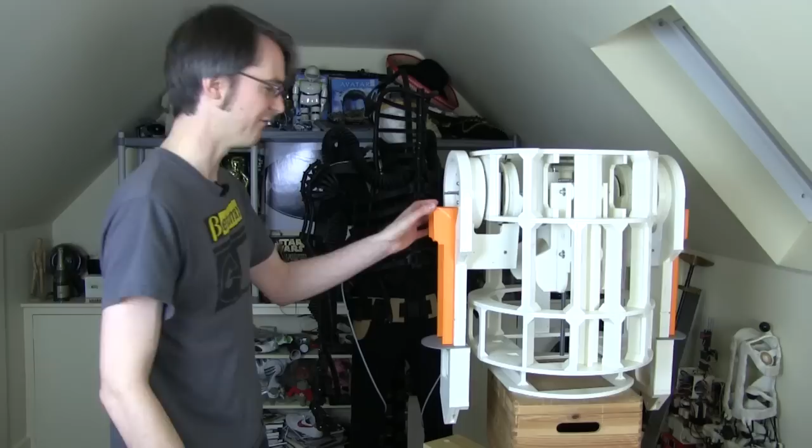So they're not too bendy. There's some more reinforcement to go in where this booster cover is, the orange part. So I think they're going to be okay, but they are slightly thinner than they should be. There's still the shoulder horseshoe pieces to go on, which will make them thicker. But in fact, there should be about another inch on the back of the leg, so they're quite a lot thinner.

So I've stuck these on quite well now with acetone weld, so there's no way to backtrack and redo it. Eventually I'll release the CAD files, and this is one of the reasons I haven't. So if you're building this from the CAD files, you need some more layers on the back. These legs are all made of 5mm layers stuck together. So today we're going to try and sort out the motorisation of the feet, and then we can hopefully try and drive it around and properly test that 2-3-2 conversion without a skateboard.

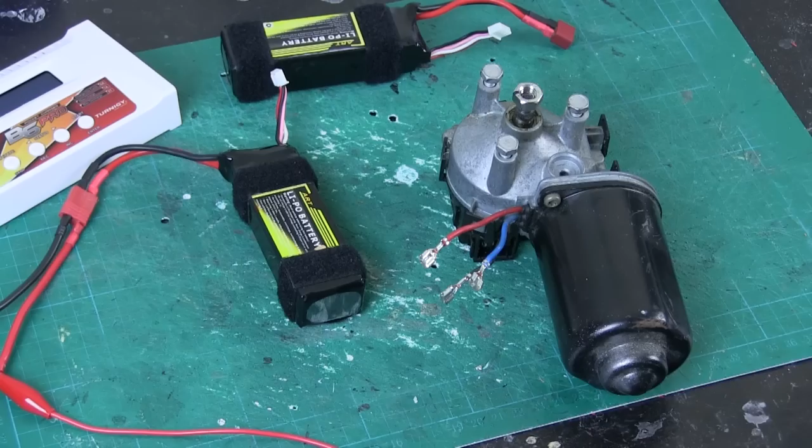My plan for motorising the wheels in the feet is to use these motors I've already got. I've looked at brushless motors and various others, but I've decided in the end to use windscreen wiper motors because they're good workhorse motors, and basically they've got a fair amount of power in them. I'm going to be powering them from some 11.1 volt lipos.

So I got hold of some batteries. They're actually second hand and I didn't pay very much for them. So I've got a number of them. They're 2 amp hour. So I've got 2 here and a couple more. I know where they came from, so I guess it's no worse than if I had used them myself. However, lipos can be quite dangerous because they can burst into flames and things if you're not careful.

So I've actually bought a fairly decent charger, which is the Turnigy charger, which does balance charging. So you've got this little cable that plugs in the side so it can balance the voltage of all the cells, and it can discharge and condition them and so on. But they seem to be charging fine.

So the good thing about these wiper motors is they've got 3 wires. They've actually got 3 speeds built into them because obviously they have to wipe the windscreen of your car. So if we go between black and red, I've put a little marker on this nut that's spinning.

So you can see that I think is the slowest speed. Black and blue goes a bit faster, and if we go between red and blue, it goes faster still. However, even in the fastest speed mode, we only get about 2 revolutions a second. So even with a 100mm wheel, we'll cover basically 2 feet a second, which I think equates to just over 1 mile an hour, which isn't really quick enough.

So actually what we need to do is hacksaw through this metal, and I've done this before for my boat propeller project. So I need to get my hacksaw out and start sawing through this. My plan to actually drive this is to use a V-belt, so instead of having a belt with teeth on, I'm just going to have a belt that grips with friction in this V shape. That means when it's pulled tight, it's pulled tighter into the V.

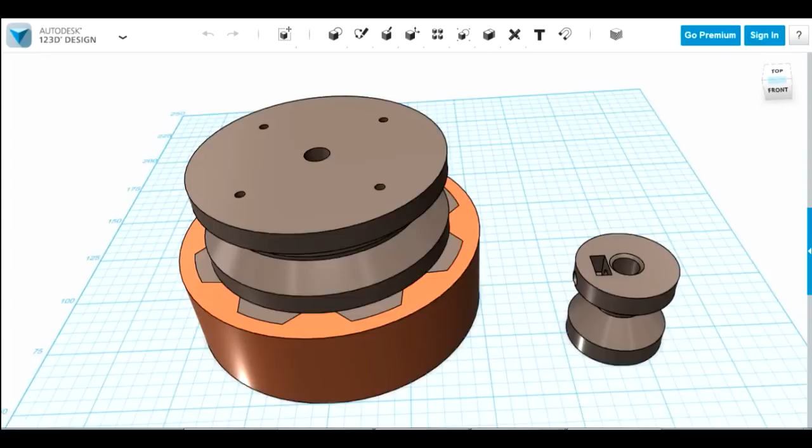So the smaller pulley there is the one that goes onto the motor, so that's going to have a captive nut in that square hole and a bolt that goes through the round hole, which then grips the shaft, and there's going to be a flat on the shaft in order to do that. The wheel itself is made of these two parts, or in fact three really. So we've got another V pulley which is going to be coupled onto it, and then we've got a wheel, and the wheel is going to have a rubber tyre on.

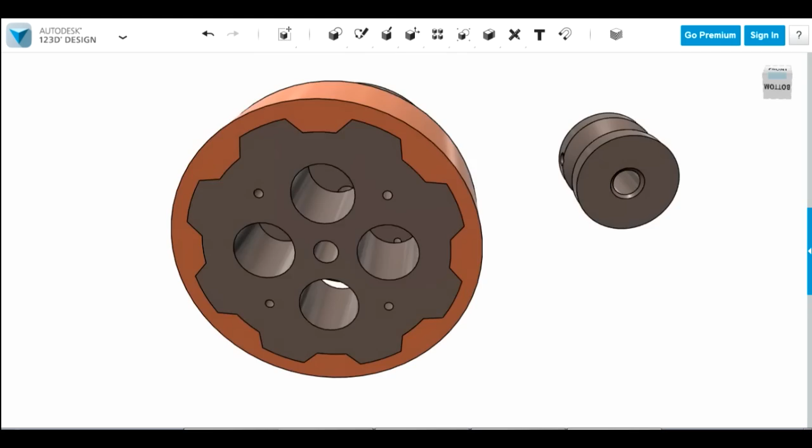So this is going to be printed as a hybrid print, with both parts printed in one print with dual extruders on the Lulzbot TAZ with a flexi dual extruder. So one is for extruding Ninjaflex, the other one is for extruding rigid material. So we're going to print this wheel in one print. So here is a previous hybrid print, which is a very similar example. It's one of the first prints I did with dual extruders, and this is a Ninjaflex tyre which is red on an ABS hub. That was printed in one print with dual extruders, and the two materials are bonded together with heat.

So the problem I've had with dual extruder prints in the past is that Ninjaflex compresses in the nozzle while it's printing, so when you switch and print with the ABS nozzle, it decompresses because it's very elastic, so that causes the Ninjaflex nozzle to ooze quite a lot. And that means the pressure's gone in the nozzle, so when it comes back to print with Ninjaflex, as well as putting ooze on the print, we find that the first bit it prints with Ninjaflex is missing because there's no pressure in the nozzle anymore, because it's all oozed away.

So if we look very closely at this, we should be able to see, perhaps, that right round the edge here there's kind of a dodgy gap where there's not so much filament, which makes a weak spot in the print. And obviously that's okay if the part is really solid, but if you're trying to do a fine print, then you'll find that you get lots of gaps in your print. So we need to adjust the slicer settings to try and compensate for that. I'm going to do two things in Slic3r which sets the settings for the actual printer.

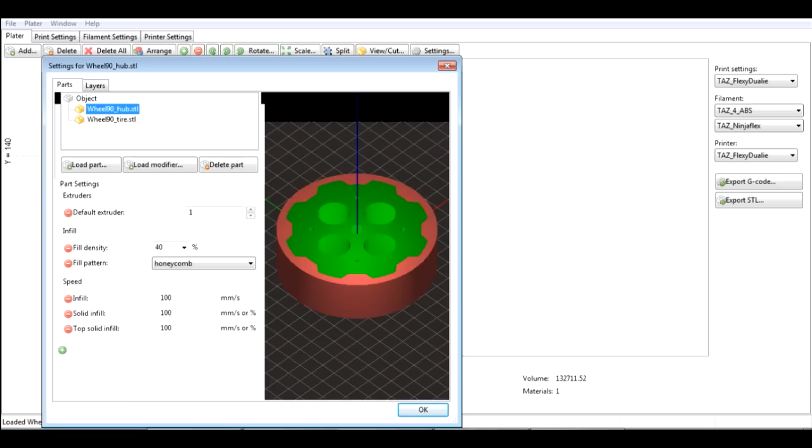So here's my hybrid print. So the hub is green when I select the hub STL, and the tyre is now green when I select the tyre STL, and each one has a series of settings. So my hub is going to print with the default extruder of 1, which is for ABS. It's going to be 40% honeycomb. The tyre is going to print with extruder 2, and it's going to be 100%.

So basically what I've done here is set the infill to print much slower for the Ninjaflex. So the hub there I'm printing at 100mm a second, and the tyre I'm printing at only 30. And the reason for that is that the infill is the last thing it does before it switches extruders. So it does the perimeters, then it does the infill. So that means if it slows right down before it switches extruders, then there won't be so much ooze because there's not so much pressure building up in the Ninjaflex nozzle.

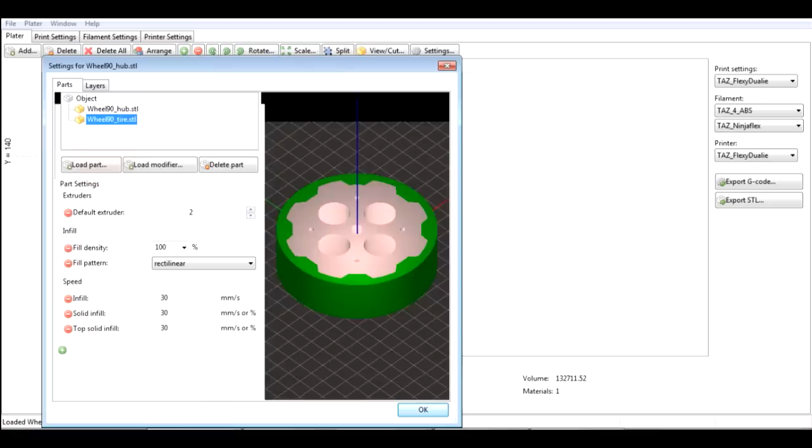So some of that filament is still going to ooze away, but when it comes back to print with Ninjaflex, it goes and puts an extra 10mm down. So that should hopefully build up the pressure in the extruder again, and then it won't leave a gap when it starts printing.

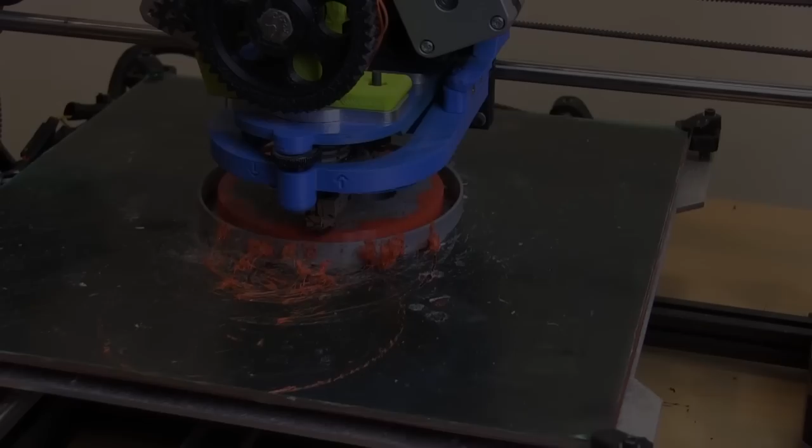So that has been printing for about 2 hours 22. It's just under halfway through to make up my 30mm height. So it's doing quite well. That is currently printing ABS there. And we'll have another look when it switches filament and does the Ninjaflex.

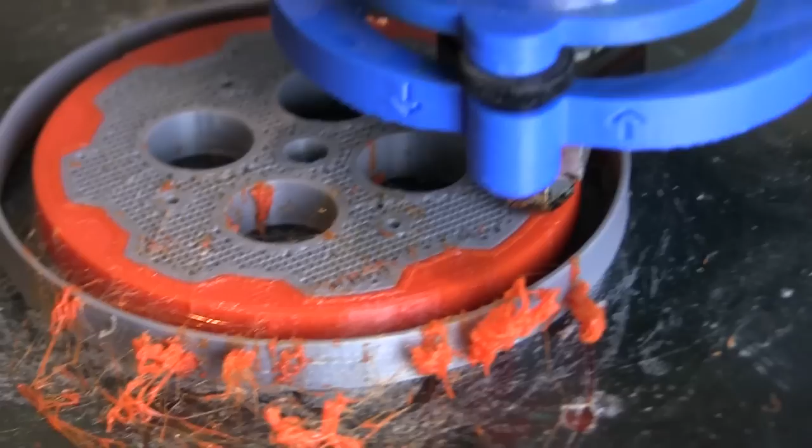So there it is, retracting the ABS and bringing out the Ninjaflex plus a bit of extra Ninjaflex. So the Ninjaflex has oozed and got caught on the brim, isn't actually missing from the print. So unlike the previous wheel example, if we go really close in on this, if I can get it to focus, you should hopefully be able to see that there's no gaps in that print. It's actually got a really good solid amount of Ninjaflex.

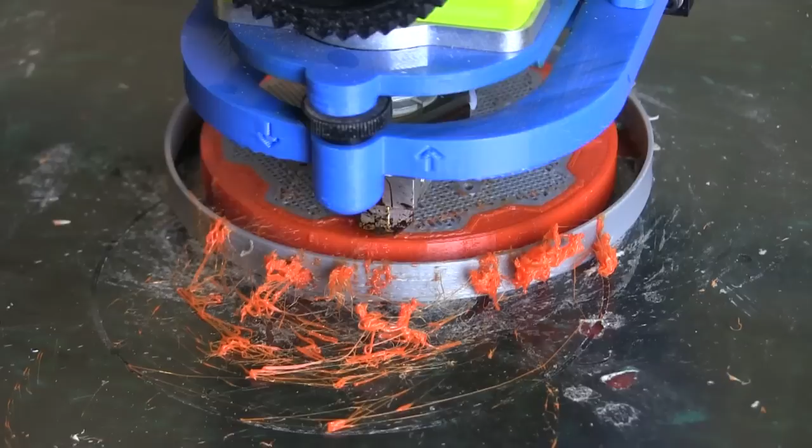So that's now doing the perimeter at full speed, so it should do 4 of those. The last one is at 70% of the speed. And now it's going really slow to do the infill, so down to a third of the previous speed, which means it's building up much less pressure in that nozzle, which is reducing the ooze. There is quite a bit, but that's from the whole print. It hardly oozes when it finishes that layer, which is quite good.

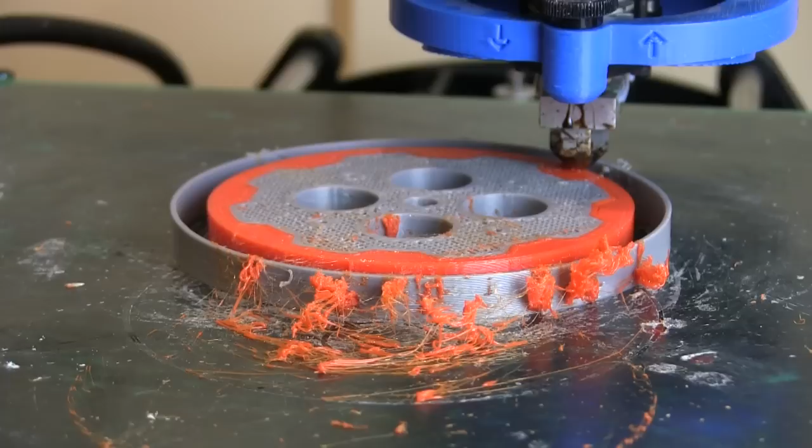So that is retracting Ninjaflex and bringing back the ABS, and you should be able to see, if you keep your eye on that nozzle, there's a tiny bit of orange ooze on it that gets wiped off. But actually it's really not that much, and eventually it only oozes so much, so we get a little bit, some of it gets wiped on the prints, but that's greatly reduced the ooze, going slowly on the infill before switching nozzles.

Here are my parts. So this is the original hybrid print and this is the new one. Hopefully you can see that's much better quality. There are no gaps there. It's looking pretty good, like solid Ninjaflex. I haven't got this dodgy weak spot basically, and everything's perfectly aligned. I also made it a kind of zigzaggy pattern around here. One, because it looks quite Star Wars, and two, so if the tyre does become detached it doesn't slip at all.

So that piece is then bonded onto this pulley, which is the other V pulley, and I've left these 3mm holes which I'm going to jam pieces of steel in so that it doesn't slip, but it will be acetone welded together. And this is my other V pulley for the motor, and you'll notice I've got that captive nut in there and a little grub screw, which is an M5 grub screw, which is actually a piece of M5 studding with a slot cut in it with a hacksaw, so that's nice and flush, and that will be able to grip the motor shaft.

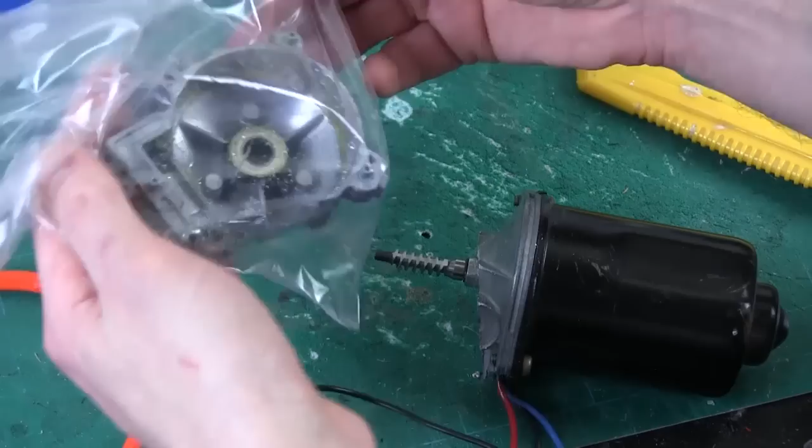I've cut the end off my motor now, as you can see. These are some of the bits that are inside, and also this is a piece of metal which is covered in metal filings and grease, so hence it's in a bag. But now we've got the main output shaft of the motor. If we just connect that up to a battery, that's in between the red and black wires, so that's the slowest mode, but it's also the highest torque. So it goes pretty quick.

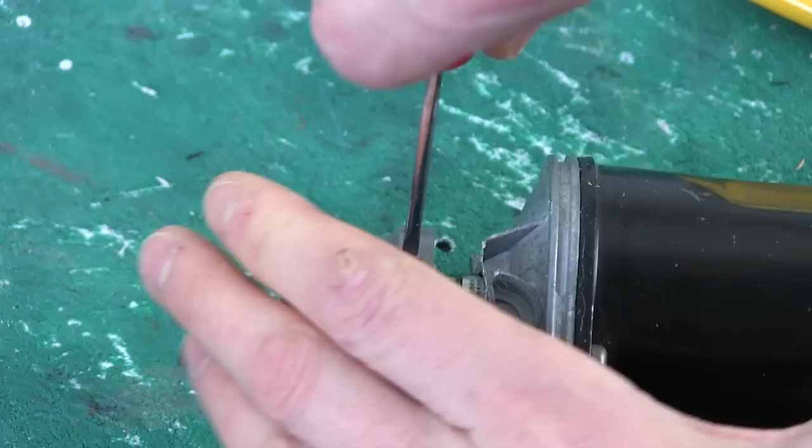What you might be able to see there, let's just try and zoom in, is I filed a flat onto that side of the shaft there. So that was originally a worm gear, which is actually part of the shaft and can't be removed. So I filed that flat on there so that I can then attach my pulley with its captive nut, so that should just do up right onto there. And that should sit on there nice and tight.

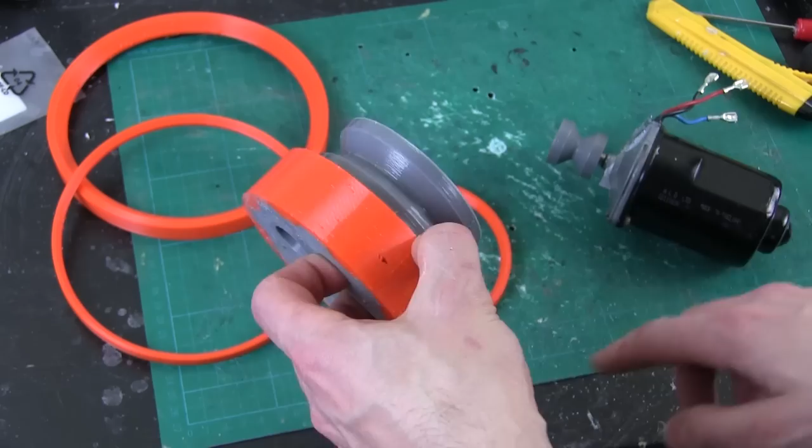I've now got my pulley attached to the other wheel with the rubber tyre, so that's acetone welded in. You can maybe just see I've hammered some 3mm steel rod in there, which is this stuff. It's just been hammered into the holes so these don't rotate against each other, and they've also been acetone welded together. I've also brushed acetone over both pulleys to make them smooth, which will help stick them together and hopefully make them more grippy, possibly.

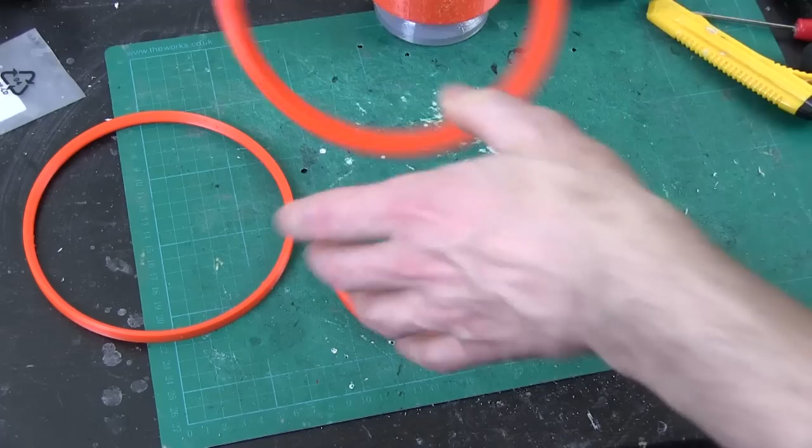So the belts themselves are 3D printed in Ninjaflex again. So basically these are V belts. I started with a really big V shaped belt. It sits nicely in the V. This was the first attempt, but it's actually really stiff, so there's no chance at all of tensioning this around the motor.

It's far too big and not bendy enough. So then I tried a much smaller one, so that again is a V shape. I don't know if you can just see that. It fits quite nicely into the V. That's a lot more flexible. It's a bit big though, so I've basically made this smaller one, and that will fit quite nicely between the two items to make that drive mechanism.

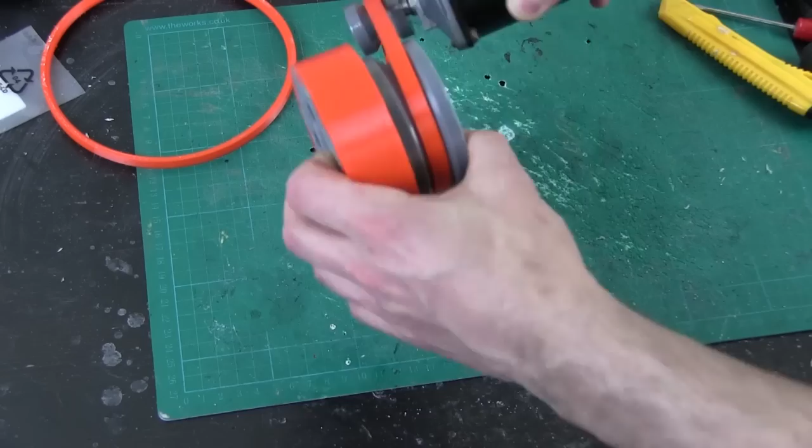It's got some stretch in it, but not that much. I can make it less stretchy, of course, by scaling it up. So I could either make it thicker back to front, and in fact it doesn't occupy the full V, so it could be wider. Obviously if it's made deeper, then it will be less stretch, or less likely to go around tight corners, and if it's wider it will just be less stretchy and have more grip, because there'll be more friction. So I'm going to start with this one, and we'll see how it goes.

The next part, of course, is to mount this on something, so I've designed a foot for them to be mounted on, which has the motor and the pulley there. So what I've done is taken the pulleys and the motor I've actually drawn in CAD so I can basically size the foot, and make sure it's the right size. So we don't actually need to print those parts again, and we don't need to print the motor.

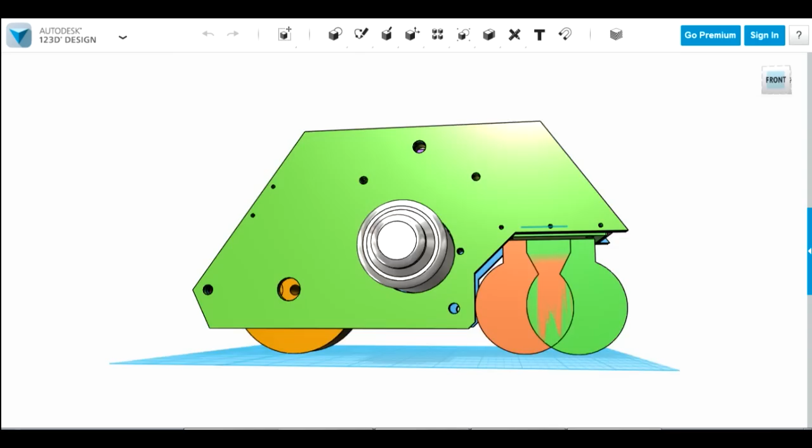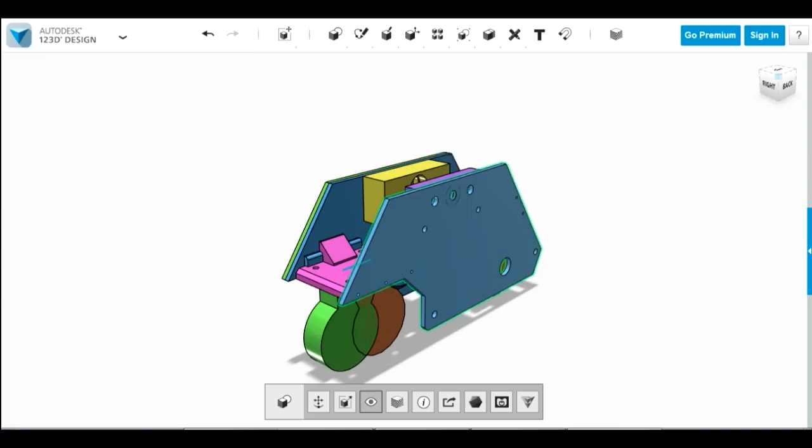Similarly, the caster on the back here, which is shown in a kind of brown and green, is another metal part. Of course it swivels round, so I've drawn that twice back to back so I can check there's enough clearance when it does so, and enough clearance to get through the gap at each side. So what we've got here are, again as usual, two 5mm layers laid together, which will be printed in ABS and chemically welded together. So if we take away this green layer, there's a blue layer. If we take away that, you can see inside.

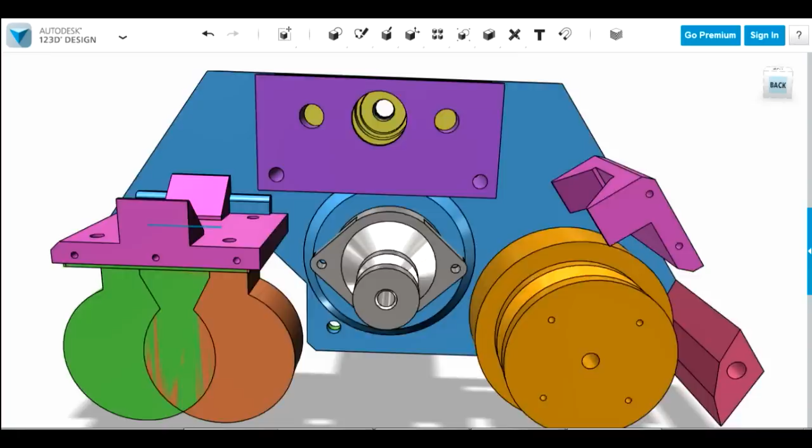There's various things at the top here to hold the leg, and also you'll notice two square cutouts there which are to hold bars which support the parallel rods to hold the foot parallel. So we'll look at those once it's printed. There's also screw holes on the bottom of those to hold the right angle brackets in, which I'm going to make out of metal. Apart from that, it's fairly basic. It's a fairly easy belt drive mechanism. Got the motor mounted there so the pulleys are parallel with each other so the belt doesn't come off. And we've got various other blocks with wedges on so that we can keep those things really rigid.

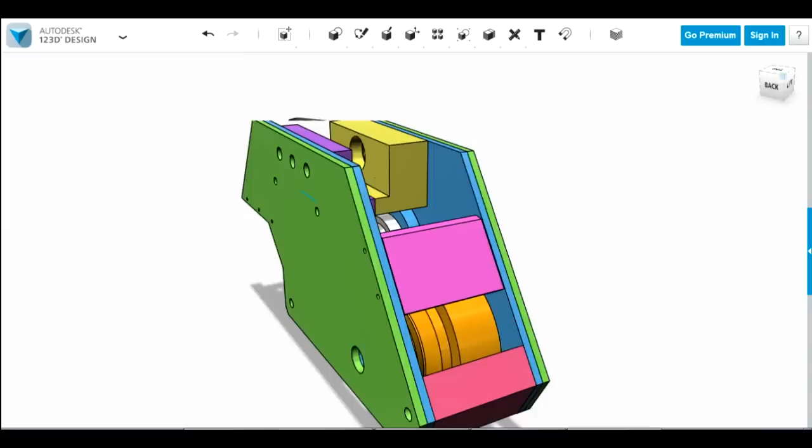So of course this isn't actually the shape of R2-D2's foot, it's also tapered at the sides, and on one side is what's called the battery box, which in this case will actually contain the batteries and motor controller. So those aren't shown here, those will be additional frame parts which are added on after that. This is just basically the main drive mechanism. As usual, all the parts are printed out and laid flat. We've got both feet there, so we've got an opposite set of parts as well. They're all laid flat on the bed so that those can be printed out, and then we'll assemble all the parts.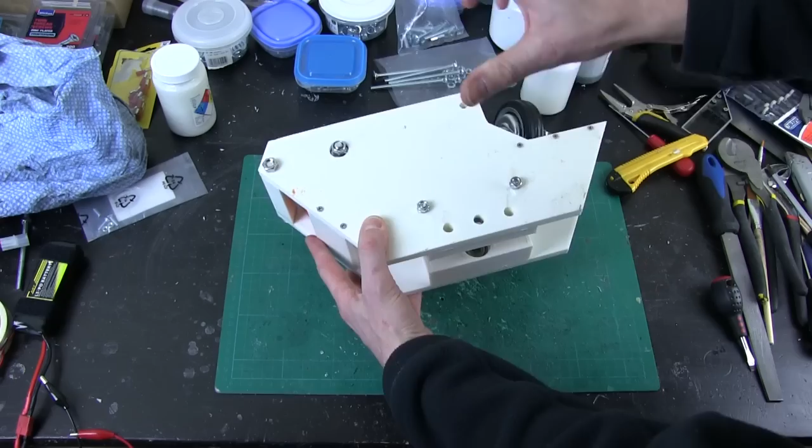So all the parts are printed and I've assembled one of these. The two 5mm layers are these, which are acetone welded together, as with all the other parts. The blocks are acetone welded onto one side, but not the other side. So this entire side will come off. There are some screws in here as well that hold these other wedges, like the mount here. And again, that caster mount is acetone welded and screwed on one side, but only screwed on the other side so I can get this off.

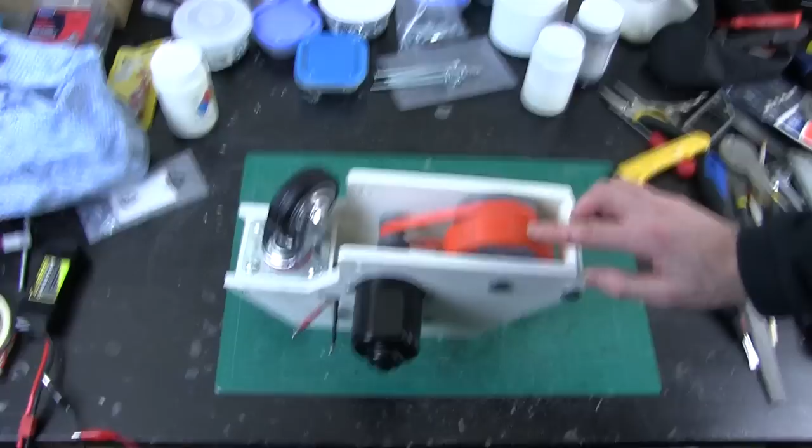And the reason for that is so that I can change the drive belt, which is sitting just in there. That seems to be about the right tension though. If I grab the motor pulley, I can just slip this if I really try. So I can, as I say, make a tighter tension belt. There's no adjuster in this to actually tension the belt. Sometimes you see in these feet there's a slider so the wheel can be winched away to tighten the belt, but since I can make custom belts any size, I haven't bothered doing that. So the caster just fits in there.

Everything looks pretty good. We've got the mount there for the leg, which we'll come onto shortly. But basically this whole thing's pretty sturdy. I've also got space there for another 8mm bolt, which could hold those parallel if it wanted, but it's pretty tough without it, so I haven't bothered to put it in. The rest of it's bolted through with 6 and 8mm bolts and nuts on the other side.

So let's give it some power. I've put bullet connectors on the red and black wire on the motor, which sticks through that handy hole. I've ignored the blue wire for now. So the red and black is the slowest motor mode natively, but also the highest torque. So let's just stick a LiPo on.

So it's going pretty quick, and there's quite a bit of torque there. The thing is going to be on casters ultimately, so that's going to be more than enough to get it rolling. And that's top speed. Obviously I'm going to have another motor controller which will actually be able to slow that down using PWM for whatever radio control system that I have.

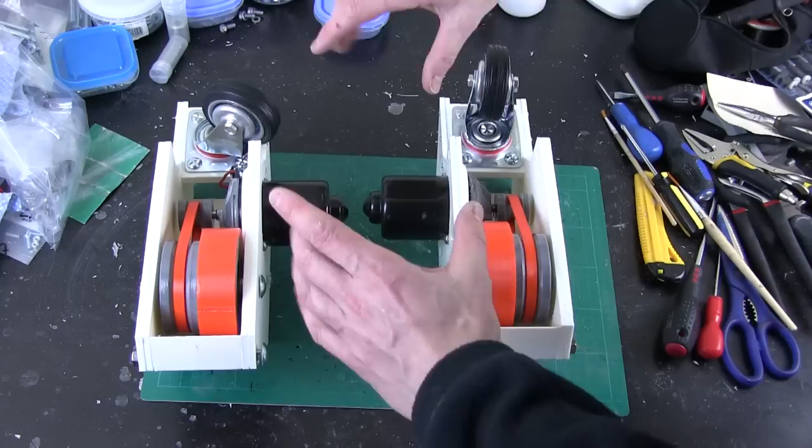And then there were two, so now I've printed out two sets, making sure of course these are opposites. And just a quick note is that the actual battery box on the side of the foot is where the motor goes. So even though they stick out, they're actually covered by another piece if you have a look at some pictures of an R2-D2.

So let's talk about motor controllers. So I've got some motor controllers, one for each motor, which is one of these, which I got from eBay. They came from China. They do up to 12 volts, and these are meant for radio control cars, so they have forward and reverse and braking functions.

And for now I'm going to be controlling this with a normal radio control transmitter and receiver, and this is a 6-channel set. I'm going to talk some more about the electronics in later episodes, but that's more than enough to control R2-D2. This was £23 delivered, and it was shipped from within the UK. It's made by FlySky, which apparently is quite a well-known make. There's a few YouTube reviews.

So normally you plug radio controlled servos into the receiver. The motor controller's got the same type of plug, and basically you plug your battery in and the motor, and it controls the motor forward and reverse on one of the sticks or whichever channel you plug it into. So that's great. We can plug in 2 of those, one for each motor, and then we can go driving around. So let's try and give that a bit of a test.

So some super high-tech testing. Obviously the Droid only has 2 legs and I haven't sorted out the mechanisms that keep the feet parallel, and I really wouldn't want to drive that much in 2-leg mode anyway. So I've just rigged this up with a bit of wood so the feet are next to each other, and I've got the batteries on the back.

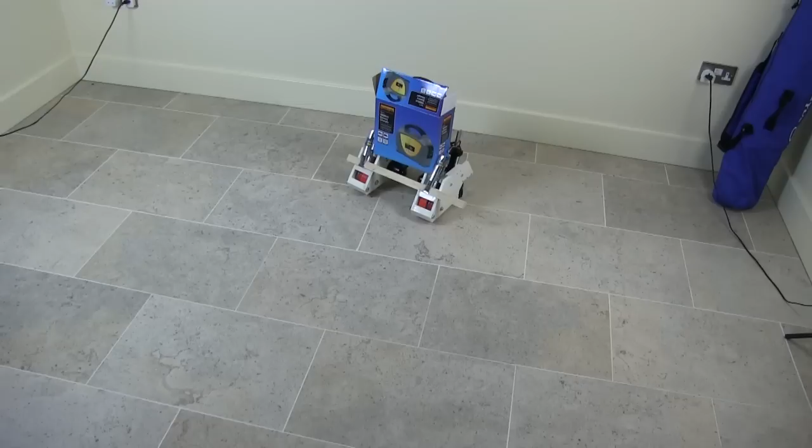The battery charger box there on top is just to apply some extra weight over the driven wheels, because without the weight of the Droid on top they slip on this smooth floor. So we're all set up for control, so let's have a go. It's going to be pretty fast.

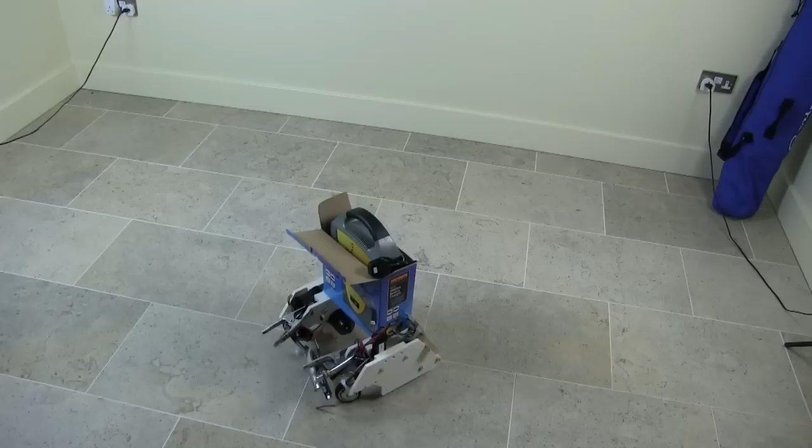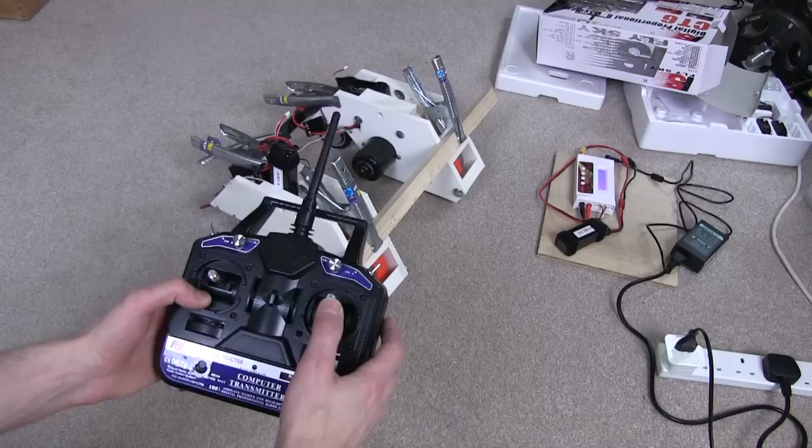The main issue I was having driving there was I've got no servo mixing, so basically one wheel goes forwards when I push the stick forwards, the other one's on another channel, so when I push the stick this way, that one goes forwards, and I was going to put it on this stick so you drive like a tank, but this one's got no spring on it for the throttle on a helicopter, so you can set it and leave it, which is quite dangerous because if someone nudges the controller it will just carry on going, whereas this one at least springs back.

So in fact I put it on this channel, which also has a spring. So I had to push the stick kind of diagonally to drive forwards and the other way to drive backwards. So that'll be rectified in the future, but for now it's really hard to drive in a straight line.

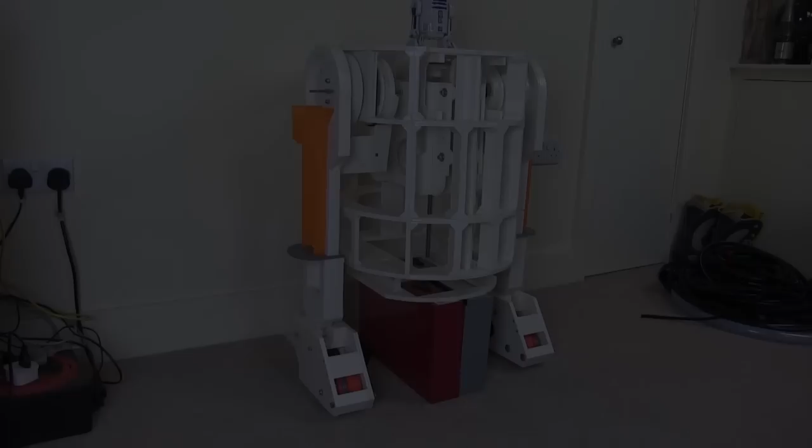This is what it's going to look like with its feet on. Obviously I still need to make the centre foot, but it's looking okay. The scale is potentially a bit weird, so it looks like its legs are quite long and skinny, and that is because of the missing battery boxes that I keep talking about.